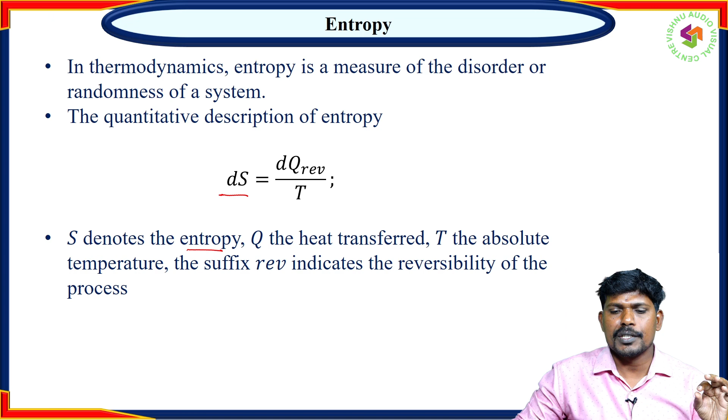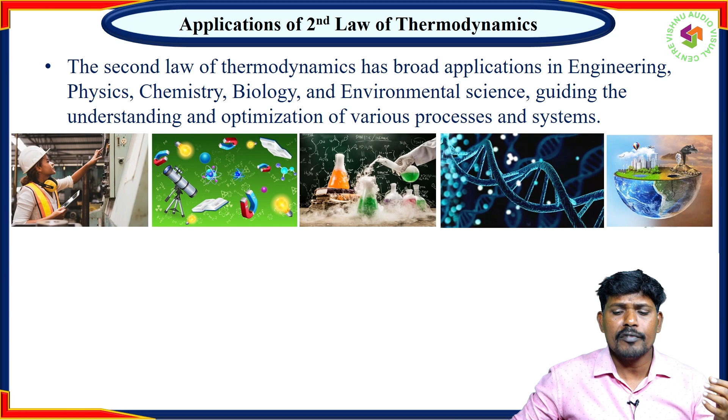Next is the applications of the second law of thermodynamics. In various fields, it is applicable to explain or optimize processes - for example engineering, physics, chemistry, biology, and environmental sciences. It is used to increase efficiency or optimize processes such as heat engines, refrigeration and air conditioning, chemical reactions, power generation, environmental science, biological systems, and entropy generation.

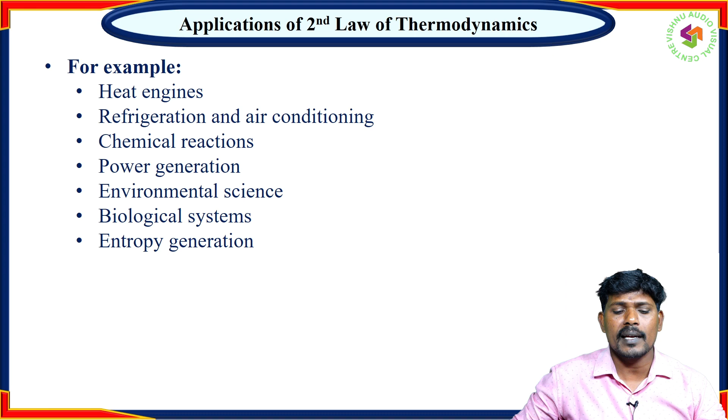Next content is reversible and irreversible processes. In thermodynamics, every process falls into one of these categories: reversible process or irreversible process. First, what is a reversible process?

Reversible process means when a process is changing from A to B, if at any point during that change we alter the system properties like temperature and pressure, and the system reverses back to its initial condition, then we can say the process is reversible. In other words, the system changes its state in such a way that it can be reversed by an infinitesimal change in the condition, such as temperature and pressure of the system or its surroundings.

Here we can see the image: a cylinder with a piston inside. When a load is applied on the piston, initially the piston is loaded with weights. When the loads are removed one by one, the piston moves upward. Again, when we start applying the loads on the piston, it comes back to the initial condition.

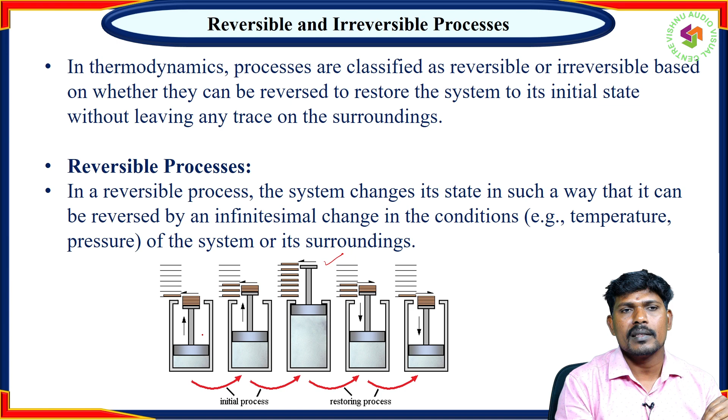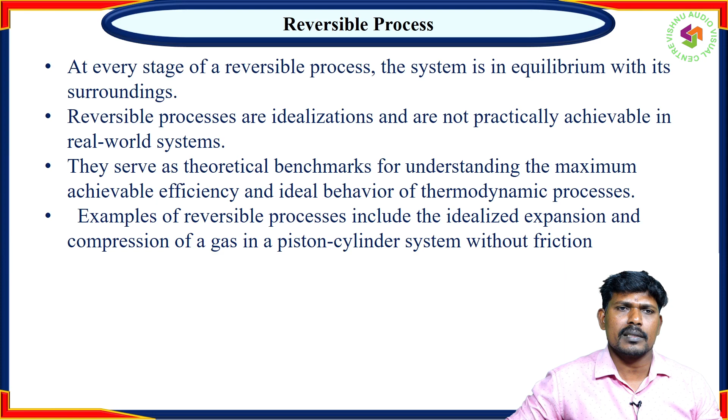At every stage of a reversible process, the system is in equilibrium with its surroundings. Generally, reversible processes are idealized processes and serve as the benchmark for real processes. In the real world, we don't have a completely reversible process, but a frictionless piston-cylinder system can be considered a completely reversible process.

Next is the irreversible process. In an irreversible process, when the process moves from one state to another, if you apply any external conditions like temperature and pressure during that situation, it won't return to the initial condition - some amount is irrevocable. If that is the situation, these processes are called irreversible processes.

Generally, these irreversible processes are spontaneous processes. During the irreversible process, the system and surroundings experience an irrecoverable change in their state. Irreversible processes are typically found in real-world applications and real-world systems. Friction, heat losses, and chemical reactions are the factors for irreversibility.

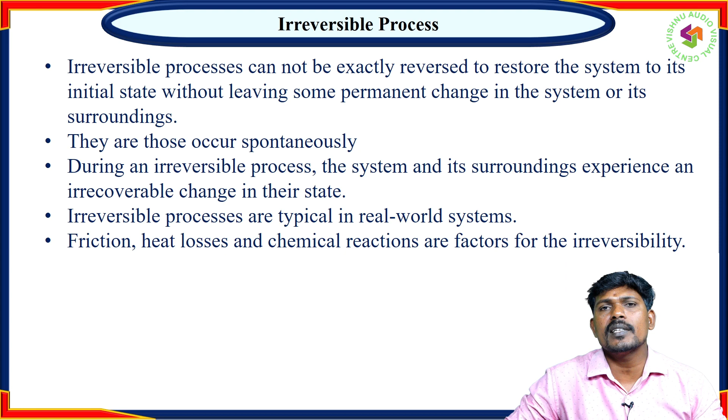Here are some practical examples of irreversible processes. For example, dropping a ball on clay. Second, hammering a nail. Applying the brake to the car. Next, breaking a glass or egg, heating food, burning a coil.

For example, applying the brake to the car. When you apply the brake, the car stops. But after releasing the brake, it cannot move further without increasing the accelerator. Similarly, in dropping a ball on clay, it will stay there; it cannot come back to the initial condition. So these are the examples.

In food also, when it is cooked, after you apply the heat, the food is cooked. When you remove the heat, it cannot come back to the initial condition. So these are the irreversible process examples.

Next is the Carnot cycle. Nicolas Sadi Carnot in 1824 introduced the concept of cyclic operations. This cyclic operation is the ideal operation. Any process or equipment using this cyclic operation can achieve the maximum efficiency. That's the reason this cycle is known as the ideal cycle.

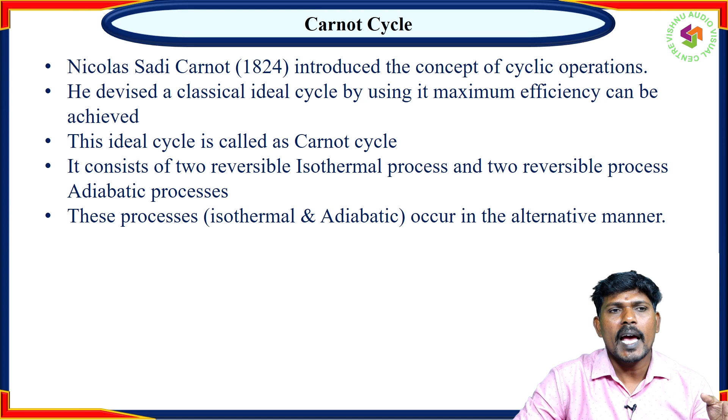So first is isothermal expansion. Next is adiabatic expansion. Next is isothermal compression, then adiabatic compression. In these, two isothermal reversible processes are there, and two adiabatic reversible processes are there.

Initially, the fuel enters into the cylinder. When the combustion takes place, the fluid has to expand isothermally. Then, after that, adiabatic expansion. Isothermal expansion means constant temperature expansion. After that, no heat loss expansion, so that whatever heat is emitted is converted into work.

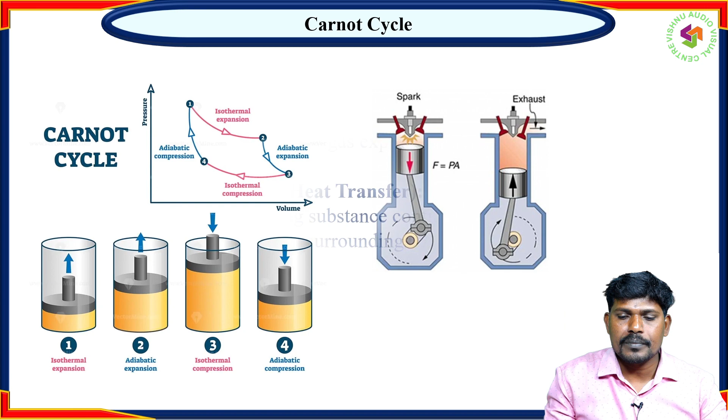So if the engine works on this cycle, then you can get the maximum efficiency. That's the reason it is called the Carnot cycle. So these are the four cycles.

First, isothermal expansion. In this state, the working substance, generally a gas, absorbs heat from a high temperature reservoir. The high temperature reservoir is the fuel. The gas absorbs heat from the fuel at constant temperature, that is TH. During this process, the gas expands and does work on the surroundings.

Next, after isothermal expansion, adiabatic expansion, there is no heat loss. In this stage, the working substance, the gas, continues to expand without exchanging heat with the surroundings. As a result, the temperature of the gas decreases, meaning that is converted into work.

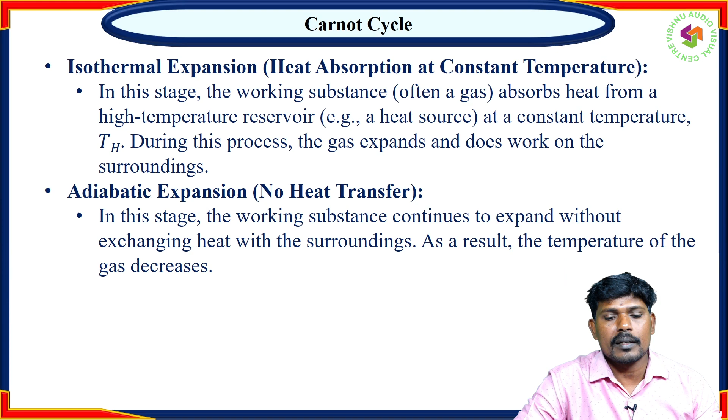Next, isothermal compression: heat rejection at constant temperature. In this stage, the working substance is brought into contact with a low temperature reservoir. Heat sinks means the heat is released at constant temperature, that is TC, released to the surroundings. During this process, the gas is compressed and work is done on it.

Next, adiabatic compression, no heat transfer. In this stage, the working substance is compressed further without any heat exchange with the surroundings. The temperature of the gas increases during this process.

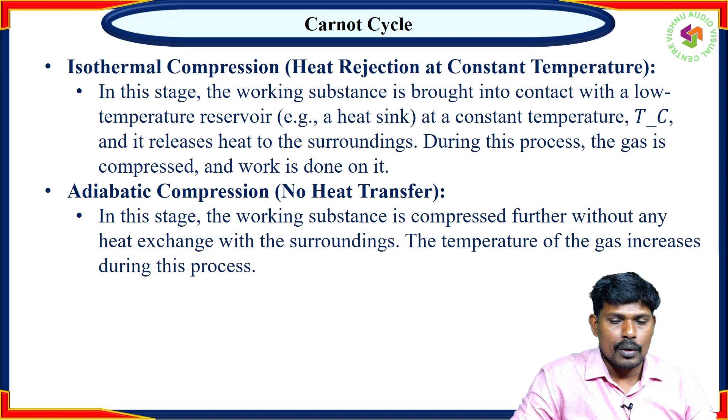Okay, this is the Carnot cycle. The Carnot cycle efficiency can be defined as the ratio of work output to the heat input from the high temperature reservoir.

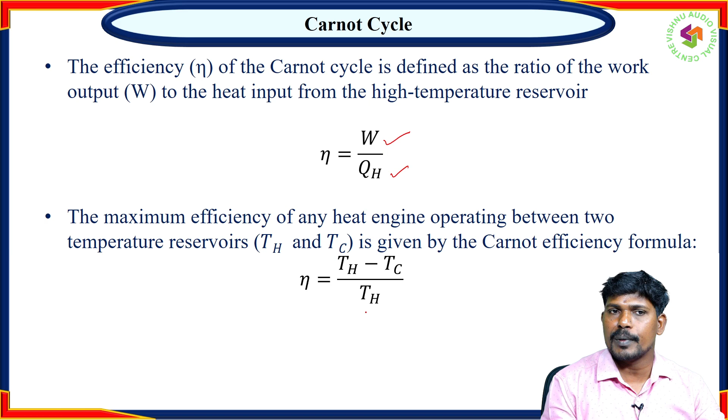So this efficiency can be explained in other terms also, because it is the maximum efficiency of any heat engine operating between two reservoirs, a high temperature reservoir and a low temperature reservoir. That's the reason the work is equal to the temperature difference between them, that is TH minus TC, and the next one is QH. You can write it in terms of heat at TH also. So now efficiency is equal to TH minus TC by TH, meaning the reservoir at high temperature minus the reservoir at low temperature, the difference divided by the reservoir at high temperature.

Next one is the TS diagram. So the TS diagram is the visual representation of the changing of entropy with the changing of temperature. For example, in any thermodynamic system, when the temperature is changing, how the entropy is changing in that system, we can see using this TS diagram visually. So this is explained by the TS diagram.

It helps to visualize the heat transfer during the process. For a reversible process, the area under the TS curve of a process is the heat transfer to the system during that process. Meaning whatever the curve is in the TS diagram, the area under the curve is equal to the work done by the system, or heat transfer to the system during that process.

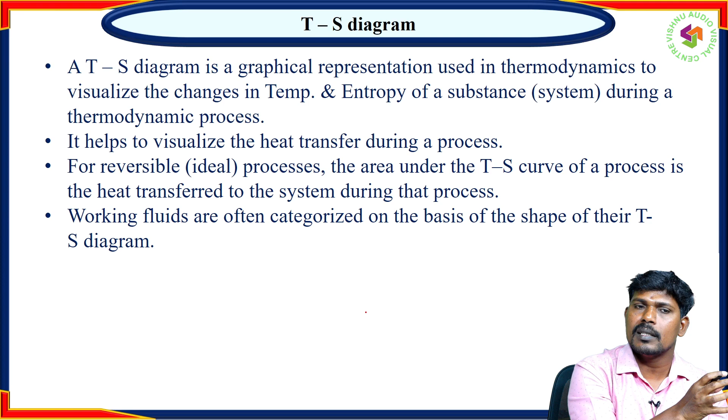Working fluids are often categorized on the basis of the shape of their TS diagram. So in the TS diagram, based on the shape for the working fluid, we can categorize. This is because the area under the curve determines the work done by the system or fluid. So if a fluid is doing a high amount of work, we can categorize: these fluids can do a high amount of work with the heat, and these fluids a low amount of work with it. We can categorize like that.

So this is what the TS diagram looks like. The x-axis is denoted by entropy, the y-axis by temperature. So in this TS diagram, this curve represents the partition of the phase. The left hand side of this curve is the liquid state. The right hand side of this curve represents the vapor state. Under this curve it is a saturated state, that is a liquid plus vapor state.

This TS diagram can be applied for various processes. For example, an isothermal process means the process is happening at a constant temperature. In that case, in this diagram these lines look like straight, horizontal lines. Isentropic process means at constant entropy. In this diagram, these constant entropy processes look like straight lines.

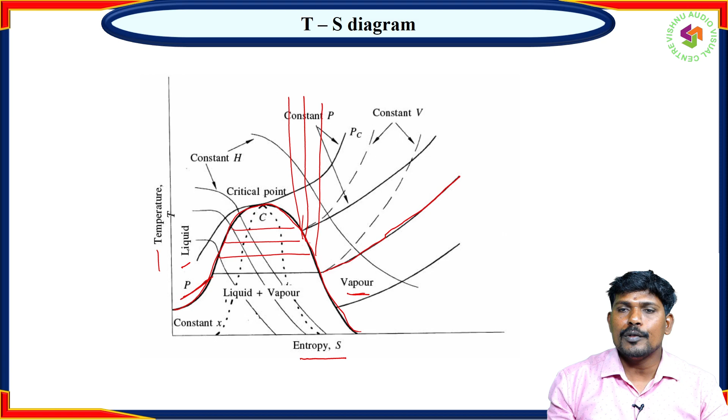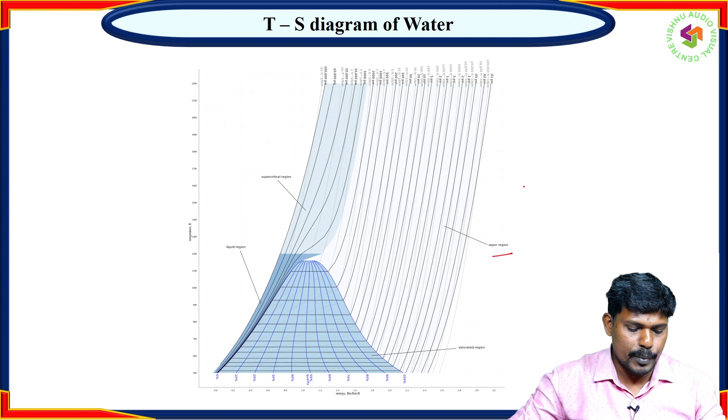The next topic is the enthalpy of mixing and disorder of mixing. Actually, enthalpy of mixing and disorder of mixing is a very important concept, because in thermodynamics generally we deal with mixtures of compounds. First one is the enthalpy of mixing.

Generally enthalpy is denoted as H, that is equal to U plus P delta V, or H is equal to U plus PV. This is the enthalpy formula. What is the meaning of that? The enthalpy of any system is equal to the internal energy of the system plus pressure and volume of the system. So that is the enthalpy of the system. The enthalpy is a measure of total heat energy of the system.

When two compounds mix, sometimes energy may be released or energy may be absorbed. What is the meaning of that? When the two compounds are mixed, there is a change in enthalpy. For example, the enthalpy of mixing can be exothermic or endothermic, means when we mix the two compounds, energy may be released or absorbed. That depends on the compounds.

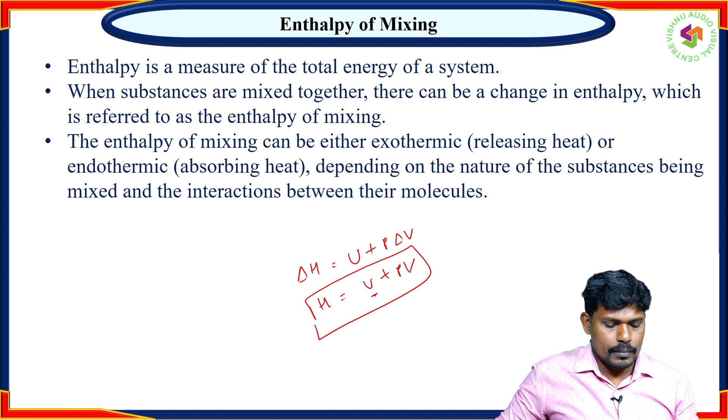In ideal solutions, when you add two compounds, there is no change in the enthalpy of mixing. But in a real situation, when we add two compounds, there is a change in the enthalpy. If the molecules of the different substances attract each other, means if favorable interactions are there between these two compounds, then energy is released. Otherwise, when A and B are mixed with no favorable interaction, energy is absorbed. The previous one is the exothermic process. The next one is the endothermic process.

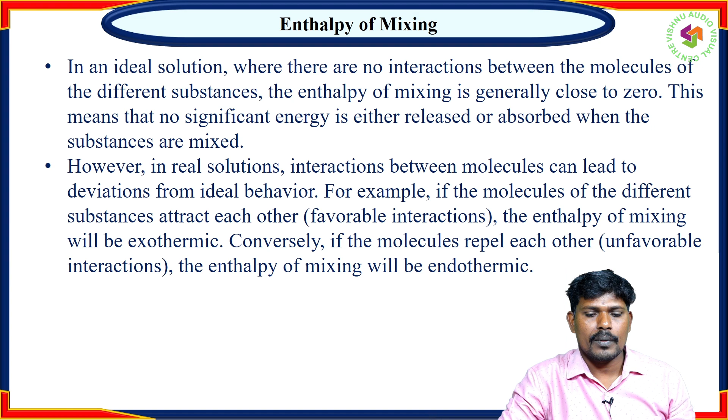Next one is the disorder of mixing. In other words, when we add two compounds, what is happening to the entropy? Disorder is also known as entropy. It is a measure of randomness or the number of possible microscopic configurations of the system. In other words, entropy is the randomness of the process. Generally, when the two compounds are mixed, the probability increases. That's the reason entropy increases. The increase in disorder upon mixing is often driven by the tendency of the system to maximize its entropy.

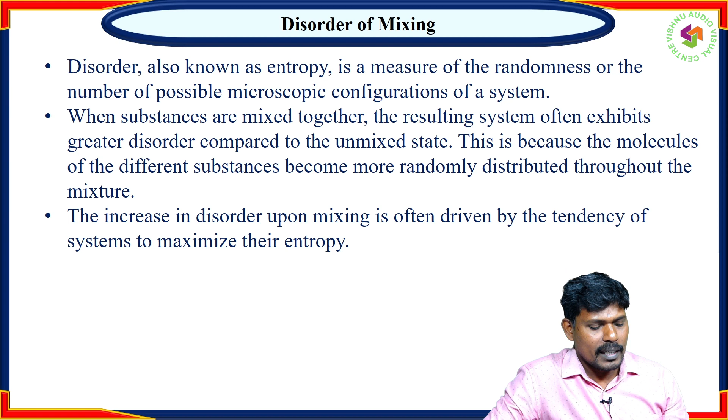Next one is refrigeration and liquefaction. First we will see what is refrigeration. Refrigeration means reducing the temperature and maintaining that temperature compared to the room temperature. Refrigeration finds wide applications in pharmaceutical process industries, for example, ice making, dehydration of gases, means purification of gases, and purification of lubricating oils. And to conduct low temperature reactions, refrigeration is useful. There are also many household applications, like air conditioning, transportation, and food preservation.

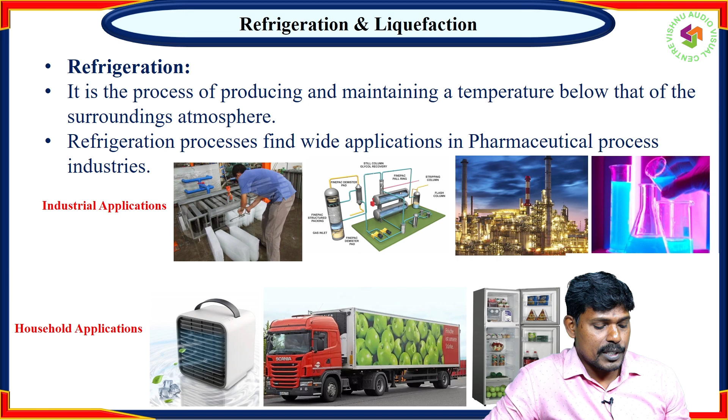Generally, heat transfers from high temperature to low temperature spontaneously. But refrigeration means developing and maintaining that low temperature. In refrigeration, heat has to transfer from low temperature to high temperature, but it won't occur spontaneously. So we need to do some amount of work. So what is that work?

We can see from this diagram, the low temperature reservoir is there with Q2 heat, and the high temperature reservoir with Q1 heat. In refrigeration, heat is transferred from the low temperature reservoir to the high temperature reservoir. To do that, we need to do work, that is W. According to the first law of thermodynamics, input energies are equal to output energies.

So what are the input energies? Q2 plus W, because these are in, is equal to Q1. So from here, W is equal to Q1 minus Q2. We need to do this amount of work to transfer this, means the difference between the two temperatures.

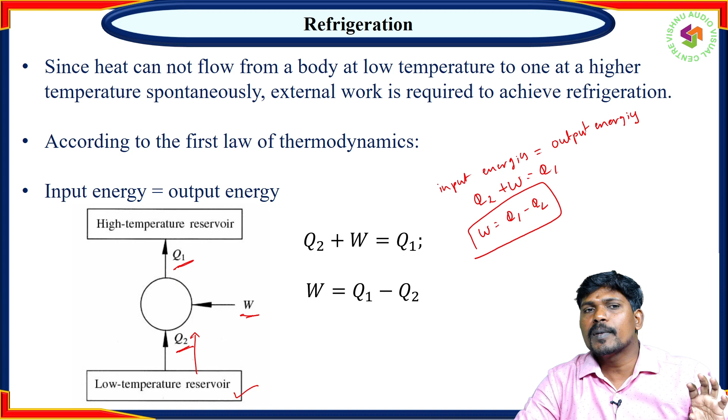Next one is the coefficient of performance of refrigeration. The coefficient of performance of a refrigerator is defined as the quantity of heat absorbed at low temperature per unit of work. So COP is equal to Q2 by W. We know already W is equal to Q1 minus Q2, so COP is equal to Q2 by (Q1 minus Q2). Okay.

So we can write this one in terms of temperature also, that is T2 by (T1 minus T2). Now COP is equal to Q2 by W is equal to T2 by (T1 minus T2). From there we can write W is equal to Q2 into (T1 minus T2) by T2. So this is the amount of work you need to do in terms of temperatures. The coefficient of performance of the refrigerator depends on the heat absorption at low temperature by amount of work.

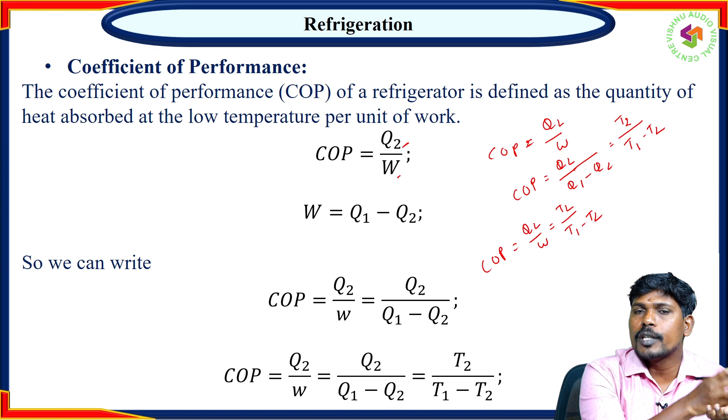Next one is the Carnot cycle for the refrigeration. Actually, we have already seen that the Carnot cycle is the ideal cycle. When you use this cycle, you will get the maximum efficiency. Okay, so this refrigeration process also works at two reservoirs, high temperature reservoir and low temperature reservoir. That's the reason we use the Carnot cycle, so that you can get the maximum efficiency.

In the Carnot cycle, first we need to do adiabatic compression. After that, isothermal heat rejection. After that, adiabatic expansion. After that, isothermal heat absorption. Okay, so only when the refrigeration process is operating in this cycle will you get the maximum efficiency. That is the Carnot cycle for refrigeration.

Next, choice of refrigerant. How to choose the refrigerant? First the refrigerant has to go through the adiabatic expansion. When it goes through adiabatic expansion, because of the expansion, pressure is reducing. Generally the capillary tube or throttle valve is used for the expansion process. When the refrigerant goes through this throttling valve, the pressure is reduced drastically. Because the pressure is reducing, temperature is also reducing. After that, there is the heat transfer between the preserved item and the refrigerant.

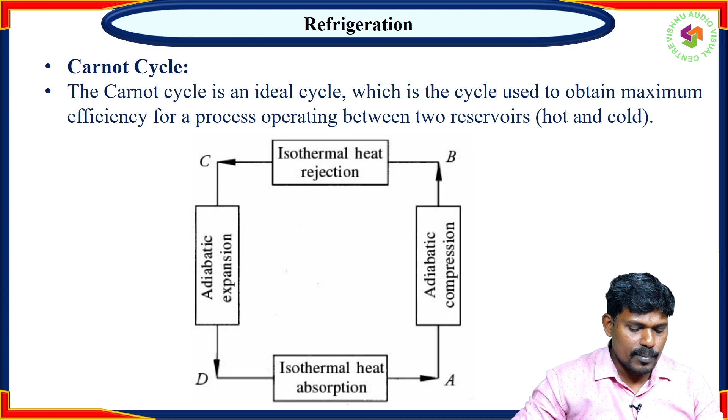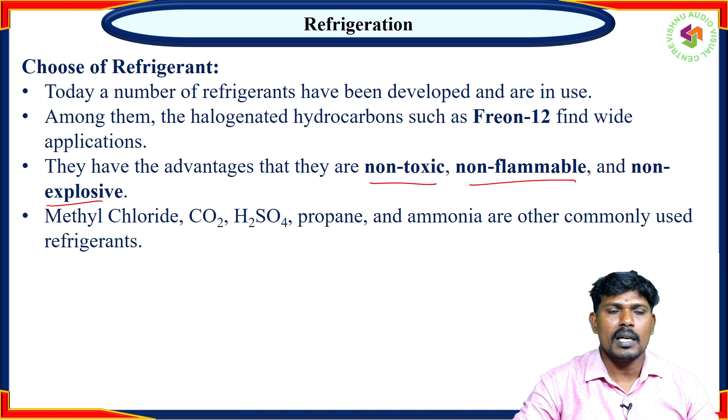Now, choosing a refrigerant. Actually, a lot of research has been done on refrigerants, so a number of refrigerants are now available in the market. But the widely used refrigerant is Freon 12, because it is non-toxic, non-flammable and non-explosive. Apart from it, other refrigerants are also in use: methyl chloride, carbon dioxide, sulfur dioxide, propane and ammonia. So these are the other refrigerants.

So in your refrigeration process, if you want to choose your own refrigerant, you need to consider these properties before choosing that refrigerant. First, boiling temperature of the refrigerant. The boiling temperature of the refrigerant must be lower than the refrigeration temperature. For example, if you want to maintain the refrigeration temperature at 0 degrees centigrade, then the boiling point of your refrigerant must be lower than 0 degrees centigrade.

Next, freezing point. The refrigerant freezing point should be lower than the desired refrigeration temperature. In the same way, for example, the desired temperature is 0 degrees centigrade.

Okay, so coming to the boiling point, the refrigerant boiling point should be lower than 0 degrees centigrade, for example, minus 10 degrees centigrade. Freezing point also, whatever the refrigeration temperature you want to maintain, the freezing point should be lesser than that.

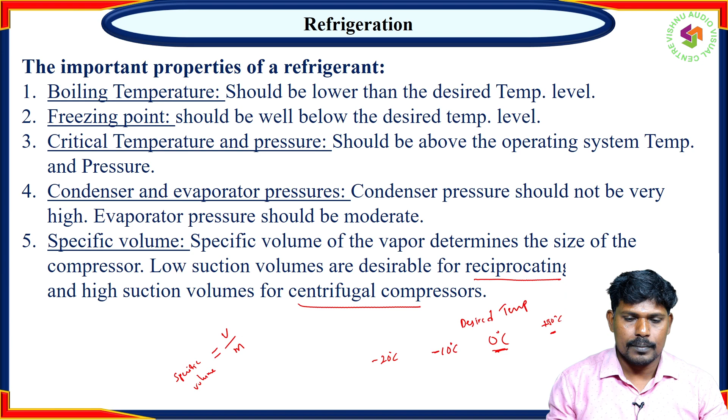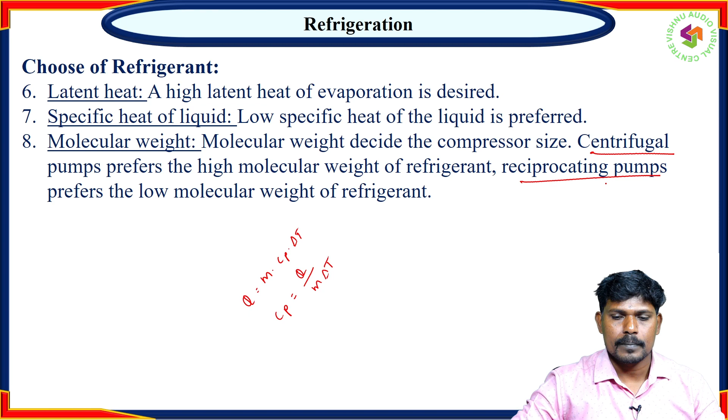Next one, the safety aspects. Generally, the safety aspects are classified into 3 categories. The first is non-flammable and non-toxic. This is the first category. Next one is non-flammable or non-toxic. Third one is flammable and toxic. So whatever refrigerant you are going to choose, which category is it coming in?

Non-flammable and non-toxic ones are more preferable. Non-flammable or non-toxic means it may be non-flammable only, but it is toxic. Or flammable and toxic. So based on the circumstances, for example, if in your system there are no operating conditions that will cause an explosion, you can choose a flammable but non-toxic refrigerant. So based on circumstances, you can choose.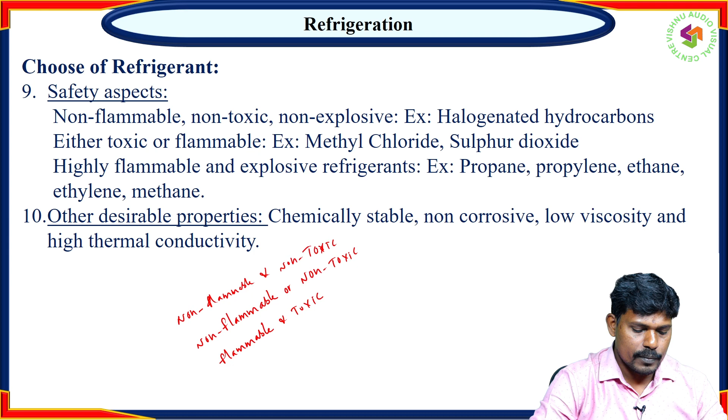Next one is the liquefaction. So converting a natural gas into liquid is liquefaction. Nowadays, it has a wide range of applications, especially because of transportation, easy handling, and easy storage. So liquefaction is used in the industry in various applications, for example, separating or purification of gases.

Okay. Apart from that, other practical applications of liquefaction are: liquid oxygen and nitrogen are widely used in missiles and rockets, and liquid helium is used in space research. Liquid hydrogen is used in nuclear weapons. So here liquefaction means converting the natural gases into liquids.

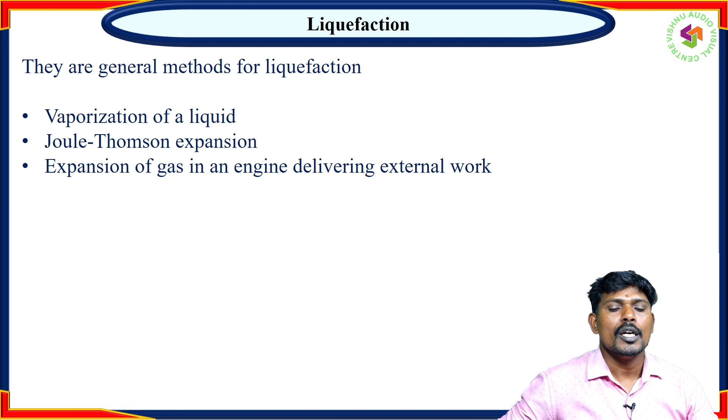Actually, there are three ways we can convert the natural gas into liquids. That is vaporization of liquid, Joule-Thomson expansion of gas, and expansion in an engine delivering external work. Now here we see only two methods. First one is the vaporization of liquid method.

The gas is sent through a series of refrigerants. The boiling temperatures of these refrigerants are lower compared to others. For example, initially the vapor or gas state compound is sent first through the first refrigerant. The boiling point of this refrigerant is, for example, T1. After that, heat is transferred between the gas and the refrigerant, so that the refrigerant temperature is raised.

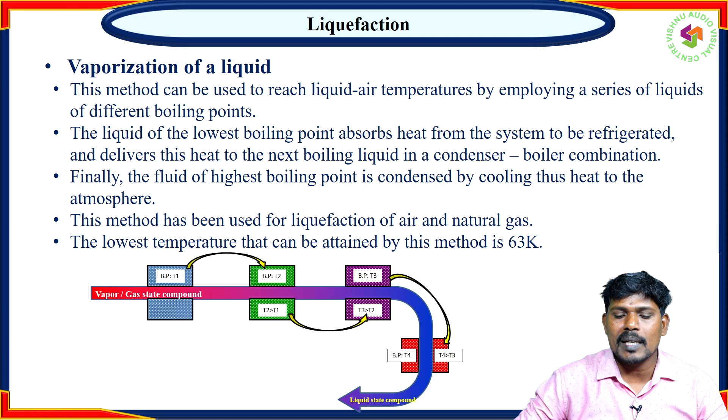It is sent to the next refrigerant, which has a higher boiling point compared to the first one. In the same manner, the third one has a higher boiling point than the second, the fourth higher than the third. At the last one, whatever heat is absorbed by the refrigerant is emitted to the atmosphere to bring it to a liquid condition. So when you send the gas through a series of refrigerants, the gas is converted into the liquid state. This is the vaporization of liquid method. It has been used for liquefaction of air and natural gas. The lowest temperature that can be attained by this method is 63 Kelvin.